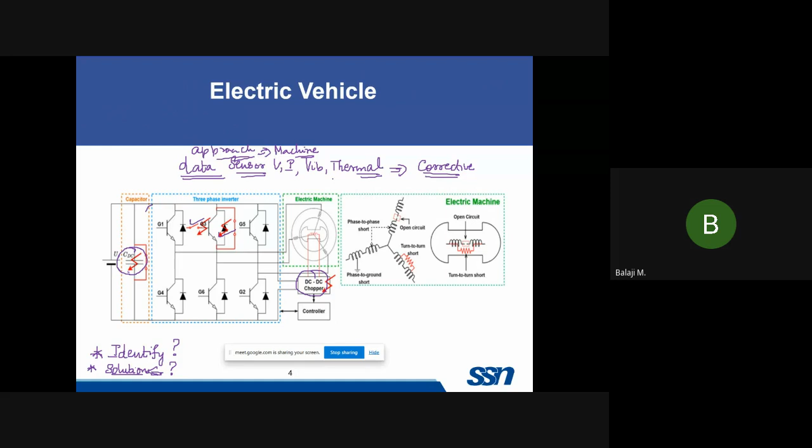This is one aspect. Similarly, the values have to interface with the energy management system, and it will provide the corrective action that is required: whether we need to charge it, what is the charge that is left, whether the vehicle can move or not, whether there is a fault in the cell. All these things it will be informing. Energy management is again coupled to two aspects, one to the load, the other to the charging equipment.

So this is just to inform you that in a battery management system itself, there are a lot of processes involved, and we need to monitor the data. So that is what I said: it is basically a data-driven approach. We require a lot of data for two cases. How will you identify it is a fault? First, we need to know the value under ideal condition and the value under fault condition. Only then will we be able to identify the fault.

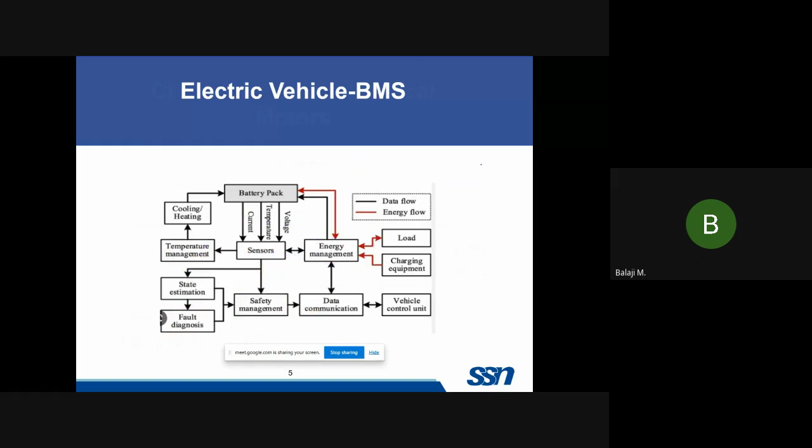So this is for a battery management system. I am talking about battery management alone. See, there are a lot of things involved in the battery management system as well. So this is one aspect. Similarly, when you take the drive aspect, there are again certain challenges there. That is what we need to understand. So this is a rough introduction of why fault diagnosis is very important.

And since these PMSMs and BLDCs involve permanent magnets, which are made of NdFeB, neodymium iron boron, some companies are also looking at switched reluctance motors for electric vehicles. I'm sure in one of these sessions, Prabhu will also be talking about how to design permanent magnet motors for EV applications. And tomorrow, I think Dr. Jayaprakash sir will discuss how to design an SR machine for electric vehicle application.

So each and every machine has its own advantages and disadvantages, but overall we can apply all these machines for electric vehicles. And we can understand that all these machines have emanated from a basic topology of synchronous machines.

From synchronous machines only, all these topologies, the brushless DC motor or PMSM motor or reluctance motor, all these machines have emanated from the synchronous motor topologies. And please understand, for fault diagnosis, each motor is different. The operation of each and every motor is different. The power converter that is required for the motor is different. So the fault diagnosis strategy will be different. So we need to choose the motor, choose the converter, and then only we can design a controller for it.

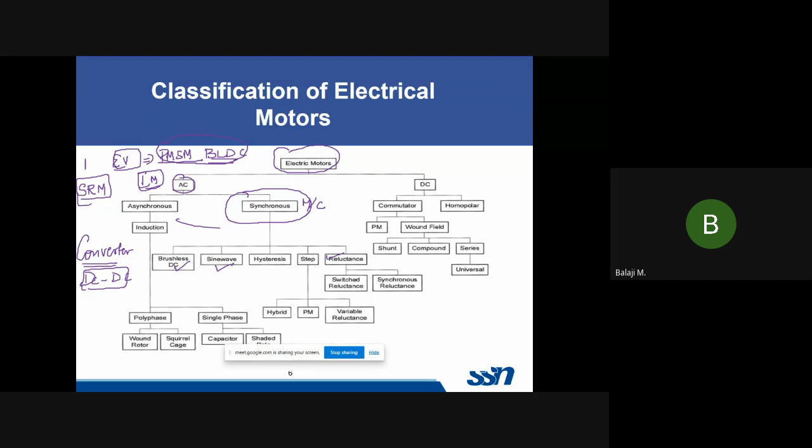So again, this offers a lot of scope for us to work, to take up a converter topology and proceed with the fault diagnosis for that particular converter topology. So likewise, we can expand our scope of work in this particular area. So this is the classification of electric motors.

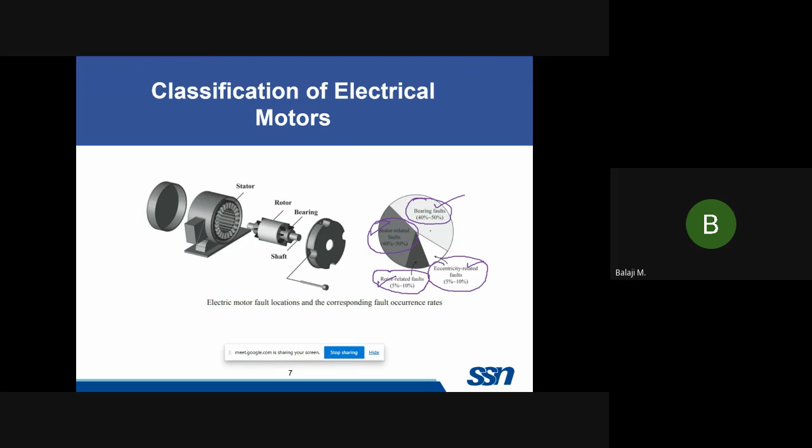So when you take an electrical motor, this is a general diagrammatic representation. We can have stator related fault, bearing fault, rotor related fault, or eccentricity related fault. Because the rotor also employs permanent magnets, there is a possibility of faults in the rotor as well. And bearing fault is separate. Stator related fault, since it employs winding, there might be winding open circuit, short circuit. And eccentricity related fault will also be present. It can occur at any instant of time. So all these things need to be analyzed and a fault diagnosis algorithm needs to be developed.

And these causes lead to different faults. It can be winding short circuit, winding open circuit, bearing damage, bent shaft, rotor to stator misalignment, eccentricity, dynamic air gap, semiconductor faults, semiconductor short circuit fault, DC link short circuit fault. Sensor disconnection is very important because most of the special electrical machines will employ rotor position sensors, or they also go for sensorless control. But if they employ an encoder type of thing, then the sensor fault is very important.

So likewise, there are different fault modes, and what are the effects? The effects are reduced torque, vibration, noise, eccentricity, increased losses. Vibration will cause torque pulsations. Increased ripple voltage, closed loop control failure, control effect reduced. So all these are effects of fault. So this slide summarizes what are the causes of fault, why the fault is caused.

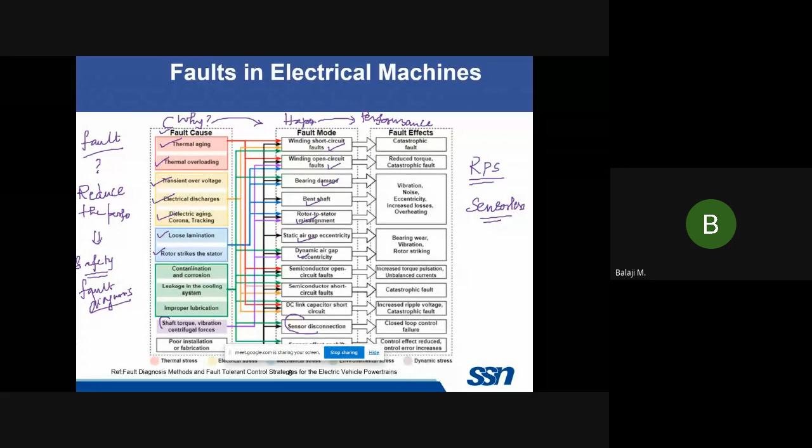So now why is fault diagnosis very important? Because there is a possibility that there can be all these faults, and all these faults will reduce the performance of the machine, and they will reduce the safety aspects of the machine as well. So that is why we need to go for a fault diagnosis approach, fault detection, and we need to provide a solution. That is the main reason why researchers are working in this particular area, right?

So again I have summarized a few points. Effects of fault: it can be unbalanced voltages, increased torque pulsations, decreased average torque, increased losses, excessive heating, and safety aspects as well need to be considered. So these are all the effects of faults in electrical machines, and we need to diagnose this. So how are we going to do it? That is what we call condition monitoring, or predictive maintenance.

So what is predictive maintenance? We measure the signal. What are the signals that we can measure? We can measure the voltage signal, the current signal, the vibration signal, and the thermal aspects. All these signals we are going to measure, and we are going to see if there is a fault or not, based on a threshold. We'll have a threshold for an ideal case, and based on the threshold, we'll see whether there is a fault or not.

If there is a fault, we'll diagnose the fault, we'll analyze the fault, and we will take an action. This action can be change the speed, or stop the vehicle, or charging, or switch on an alternate switch. Like this there can be different actions which can be taken. So this diagram summarizes the entire process of fault diagnosis.

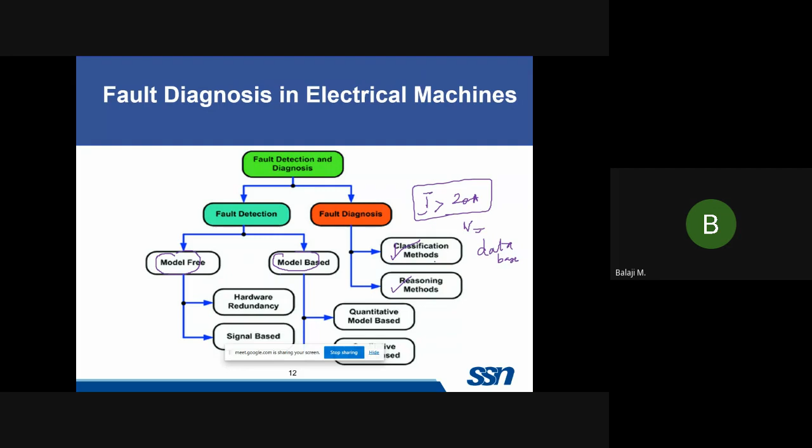Again, I have a data, I'll train it, and then I can classify what is the nature of fault. So this requires a lot of database. But this is basically reasoning. I predict the value, and from that I'll have the output. So this is what I call model based.

In a model based approach, what will happen? I'll have the original machine. I'll have the model. Both will be running in parallel. I'll give the same input. This model will predict the correct output. In case of fault, the observed output will vary. And based on the comparison between the predicted output and observed output, I can make a decision.

I'll repeat it. So in a model based approach, I'll have a model which is similar to the plant which is running. I'll give the actual input to the plant or the drive as well as the model. This model will produce the correct output. I have tuned it to the actual output. And then I'll have this plant. This will give the actual output.

So based on the difference between the correct output and the actual output, or I can call it the reference output and the actual output, I can make a decision what type of fault. So this is one approach which I can do. This is what I call model based fault diagnosis.

So what are the different methods here? Here again we have two things. One, we call it a qualitative model and quantitative model. So here we have knowledge based trend analysis and hierarchy. We can have different hierarchy based models, or here I can have a parameter estimation. I estimate the parameter. I go for computational intelligence method, or I go for quality control based method. So these are all the model based fault detection methods.

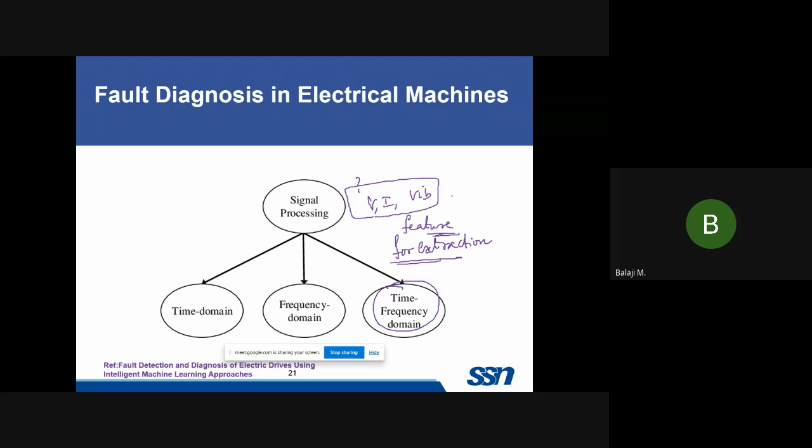And why is signal processing very important? Because as I said, all these voltage signals, current signals, and vibration signals are time varying. So that is why I'll go for time frequency transformation for extracting the features. In time frequency transformation, there are different techniques. I am not going into the details.

Once we extract the features, then we can identify the fault with the help of neural networks, fuzzy logic algorithms, expert systems, or we can use hybrid AI techniques for identification and classification of the faults. So this is how it is done.

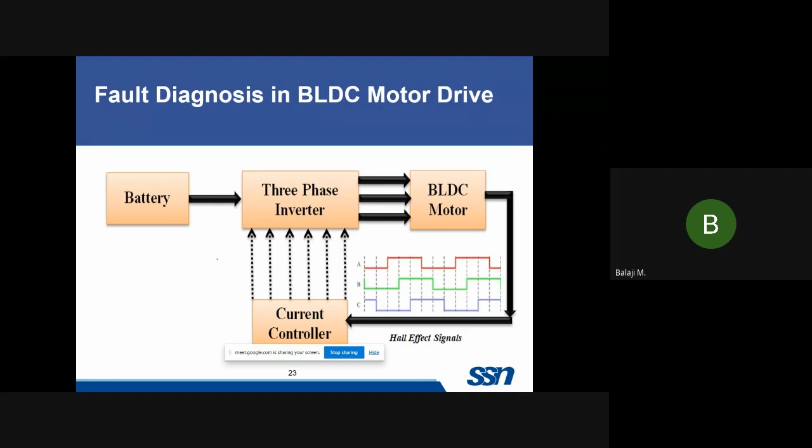So now, take fault diagnosis in BLDC motors, how it is done. We have done work on Hall sensor fault diagnosis. We have a battery, followed by a three-phase inverter, which is given to a BLDC motor. The output from the inverter drives the BLDC motor. We have a current control. So this is a simple block diagram for a BLDC motor drive.

So here, this is the structure. Depending upon the requirement, we can also go for a boost converter. So what we tend to do is take the S transform analysis.

Okay, why do I say S transform? S transform is a time frequency transformation to extract the features. So from these features, we train a neural network for classification, whether it is an open circuit fault, single phase switch fault, double switch fault, or short circuit fault. Like this, we tend to classify the different types of faults. So this is what we were aiming for, right?

So there are different time frequency transformation techniques. Either you can go for S transform, or wavelet transform, or short time Fourier transform. Like this, you can have different transformation techniques, and each one has its own merits or demerits. There is one more transform, which we call the Hilbert transform, so you can also go for that. So that is how it is done.

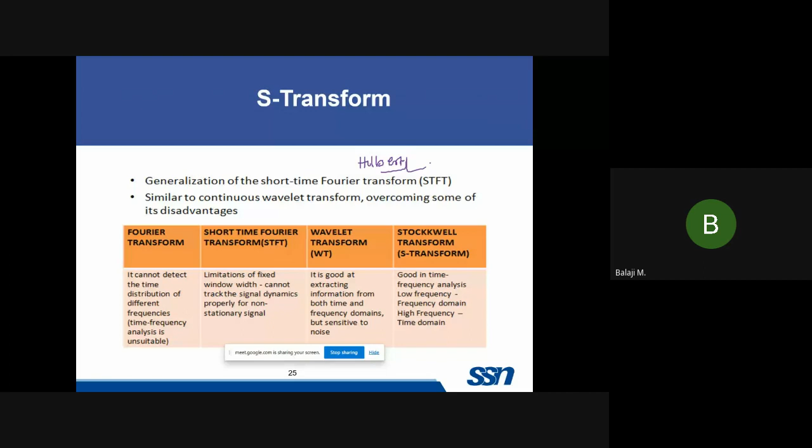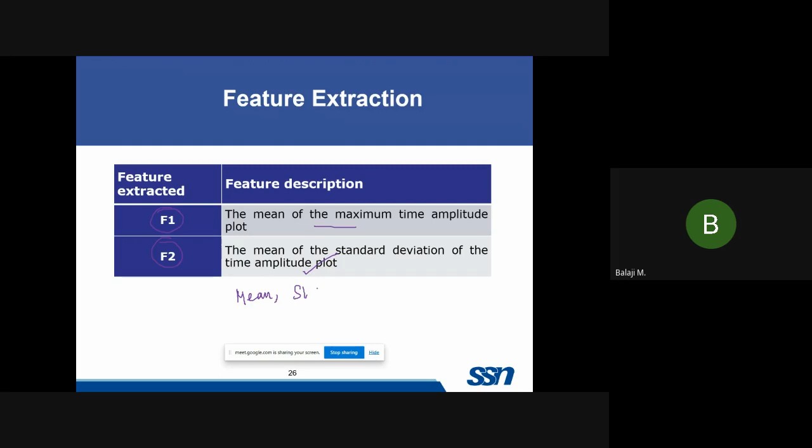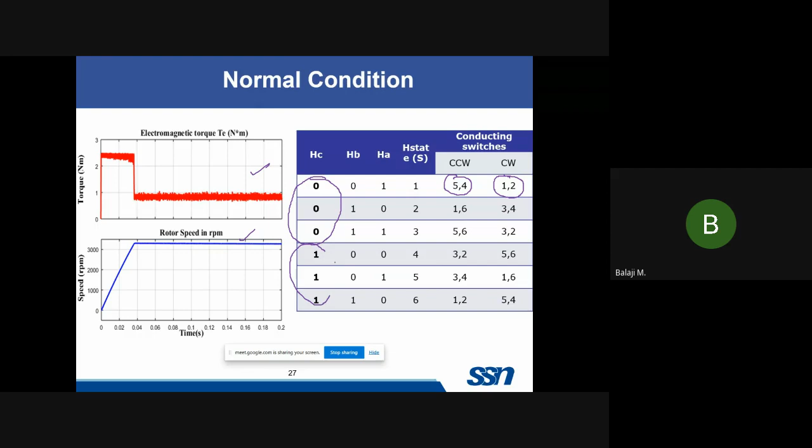Now we will extract the features for normal condition. These are the values for the normal operating condition. Now we introduce a fault in a Hall sensor. We assume that there is a fault in Hall sensor C. When there is a fault in Hall sensor C, we see that this Hall sensor is not changing its value. In the previous case, the first three states were 0, 0, 0 and the next three states were 1, 1, 1. This is the normal operating condition, so there is a change in the Hall sensor value.

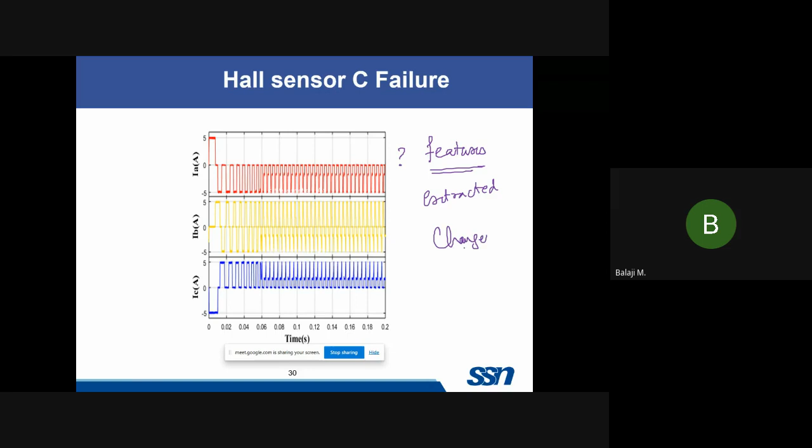So due to this, what will happen? The features that are extracted change. So what are the values? See here, the values are changing. This indicates that there is a fault in the Hall sensor, a fault in Hall sensor C. So these are the values that we have taken.

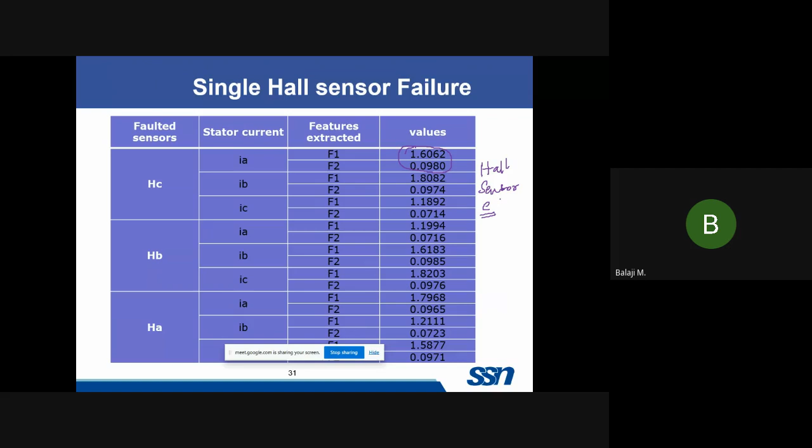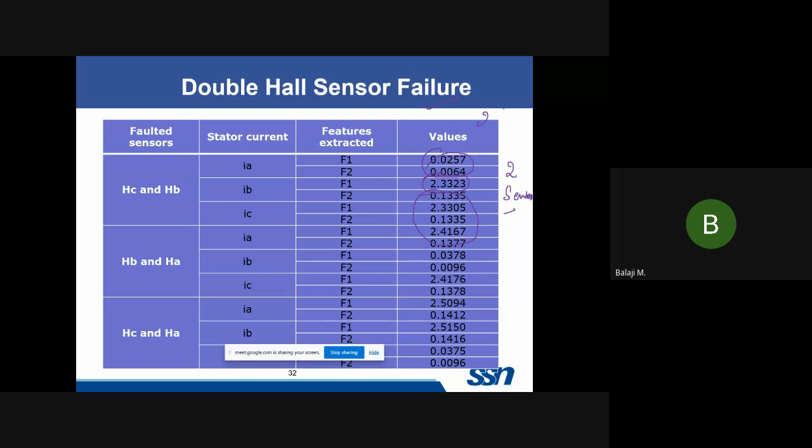So I'll have the feature values. If any one of the feature values matches with the single Hall sensor fault, what will happen? I'll say that there is a Hall sensor failure. So for that, what I require? I require data. So that is how I'll classify the fault.

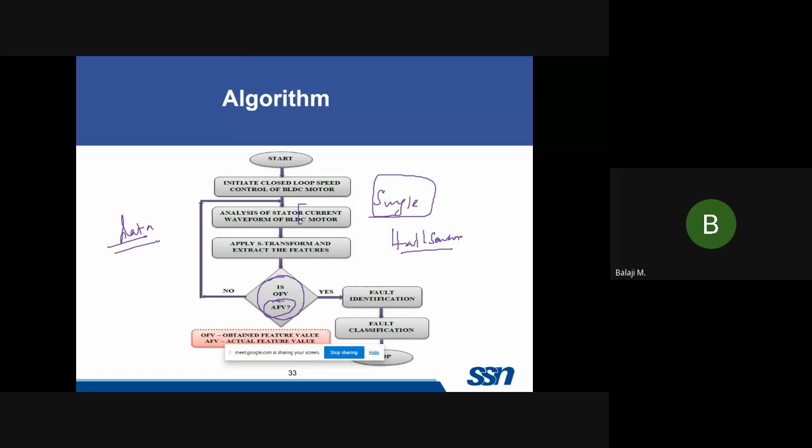Okay, so this is again a diagram. I'll analyze the stator current. I'll do S transform analysis. From the S transform analysis, it will identify whether there is a single Hall sensor fault or whether there is a double sensor fault. Okay, so this is how it is done, right?

Okay, right. So now what I have made is a MATLAB video presentation on how to classify, how to extract the features. I'll just share that particular presentation so that you can have a better idea on this. I'll stop sharing this, and I will share that particular window.

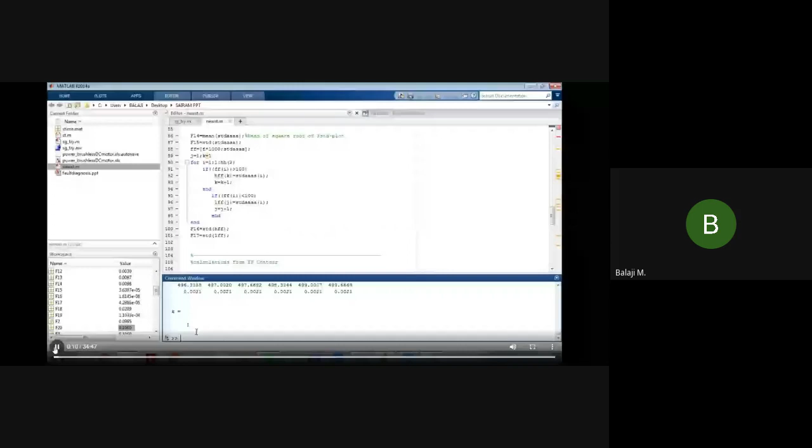Are you able to hear the sound? Yes, sir.

To extract the features using S transform and Hilbert transform, I'll take first a general sine wave and we will see how to extract the features of the sine wave, and then I'll take a sag wave, and then a swell, and I'll show how the features will vary. Once it is over, we'll proceed to how to extract the features in the same way for the BLDC motor that we have used in an electric vehicle, or any motor, any induction motor, you can use

the same procedure. So as I said in my lecture, whenever we want to identify a fault, there are two steps. The first step is we need to extract the features. The second step is we need to classify what kind of fault. So we are in the first stage, feature extraction. So for this, first I'll take a simple sine wave. First I'll generate the sine wave for simplicity.

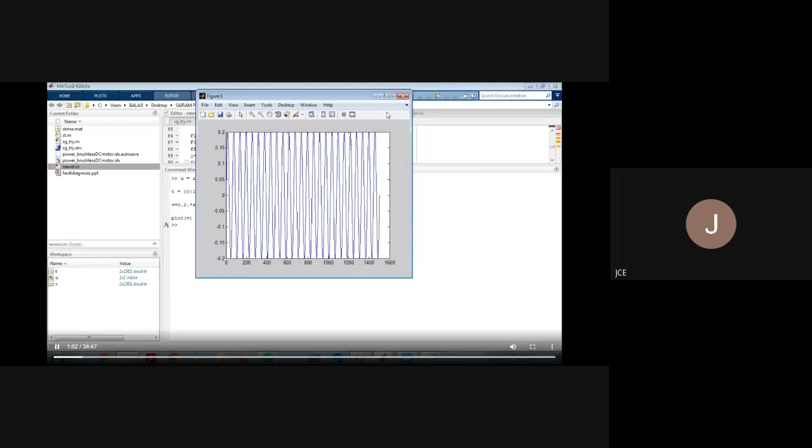These are all the initialization instructions. I initialize the value of t. I give the limit for t. T varies from 0 to 0.5. This is the time interval for t. And I'll just say v is equal to 0.2 into sine omega t. And then I say the plot command. So we will get a normal sine wave. This is the waveform of a normal sine wave.

Now, the algorithm that we are going to use should identify this as a sine wave. So this is a time varying waveform, or we can say the waveform varies with respect to time. So we need to apply a transformation technique, and we need to extract the features that will characterize this waveform. We should get numerical values that will characterize the waveform.

We can take the RMS value of this, but when we have more number of features or more number of waveforms, then RMS value might not be a good indicator. So we'll go for the transformation techniques, S transform and Hilbert transform. So we'll see how to use the transformation technique. I have stored the values in a variable called v. Now I'm going to apply an S transform.

So to apply the S transform, I have a pre-written program. Just 1 minute, it will open. See, the program is open here. So this program, which is available in MATLAB, will give the S transform features.

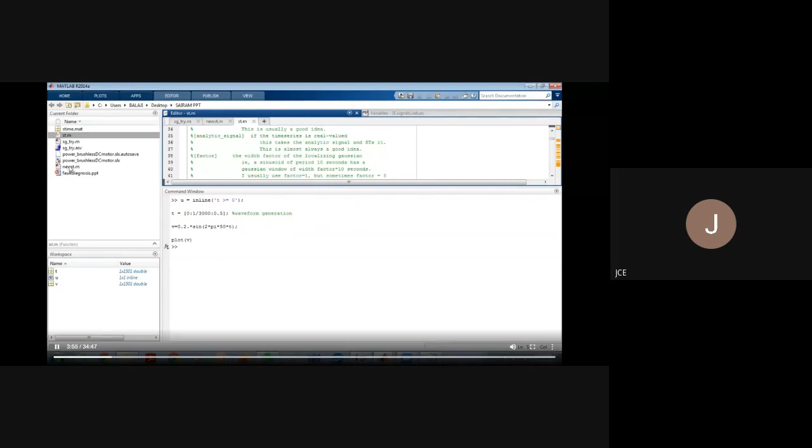So for this, what is the input? The input is going to be my waveform. Here I have taken it as a sine waveform, right? And I need to extract the features. So I have written a program called newst. You can have any name. So there are two programs. One we call newst, which is used to extract the features. Here I have written a subprogram. So what I do is I take the S matrix. ST stands for S matrix.

T stands for time, F stands for frequency, and I give the name of the input value as V. V is my sine wave. So when I execute this particular program, it will in turn call this ST, and I'll get the features. So F1, F2, F3, F4, F5; I have taken 20 features. We'll get the values of those 20 features.

So that is the first step. What is the first step? I'll give this program new ST. So when you see, this will take the S transform, and here we'll get the features, F1 to F10, because it is arranged like this. Like this, I have initialized 20 features. I'm not going into the details of what features we have used. So these are all the values.

So for example, for a particular sine waveform, here the magnitude we have kept as only 0.2. If you see the plot of the waveform, you'll be able to see. So what is F1? F1 is a maximum of the time amplitude plot. The S matrix will return two values, time as well as frequency. So the first four features represent the time amplitude plot, or we call it the time maximum amplitude plot.

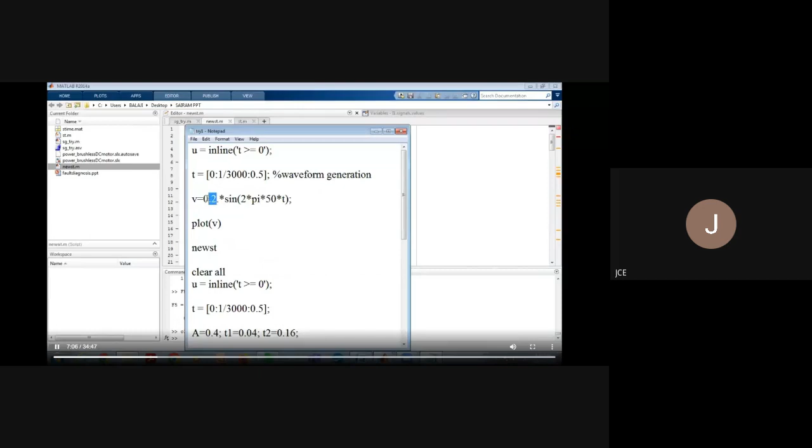Now I'll clear this. You can also get a normal waveform with a higher amplitude. So I'll put it as 1 and first plot this waveform. Now we have a higher amplitude. This is also a normal waveform. Why we are doing this exercise is because it should differentiate the normal condition from a sag condition or a swell condition. This is not a swell; it is a normal sine waveform.

Even for a normal waveform, when the amplitude varies, the feature values will vary. That is why we take different waveforms as inputs and train the machine learning algorithm. So again, for a normal waveform, I do the S matrix and calculate the value. Even though it is a normal waveform, F1 is 0.5. F2 is also 0.5, F3 is 0.5, F4 is 0, F5 is 0.5.

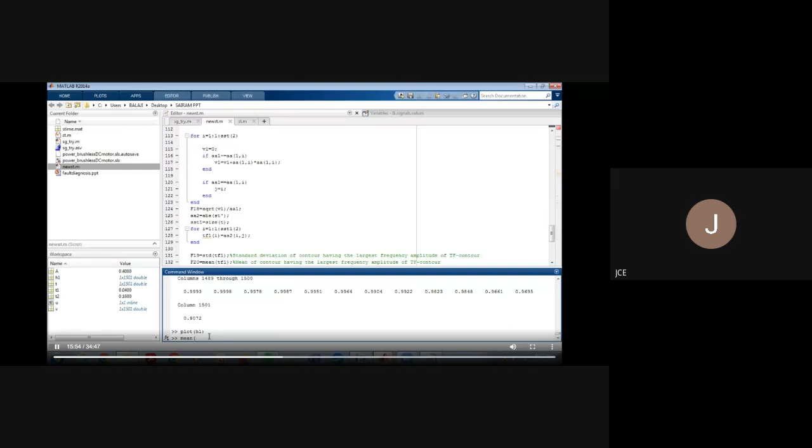So now how to characterize this? To characterize this, again I can take the features. I can say mean of H1. So mean of H1 is 1.0957. So this is one technique. This we can extend. We can have some more features, and you can characterize the features corresponding to that particular wave.

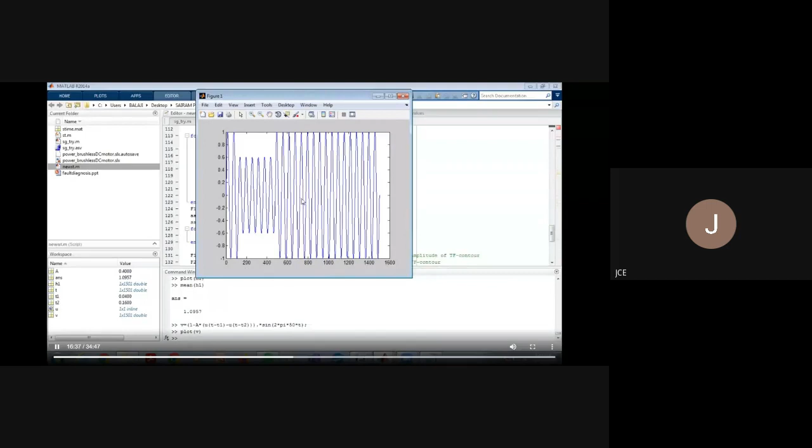Now the same thing, we'll just take up one more example. I have taken a swell now. Now I'll take a sag. So when I take a sag, I'll just give the value and say plot of V. So now there is a sag waveform. For this sag waveform, I'll take the Hilbert transform. Now I'll say plot of H1.

So see here, there is a marked difference between those two waveforms. In the first swell waveform there was a swell, but now here there is a sag. So there is a dip here, right? So it means that there is a variation here. Now, if I take mean of H1, it will be different. It is only 0.9, indicating that there is a sag.

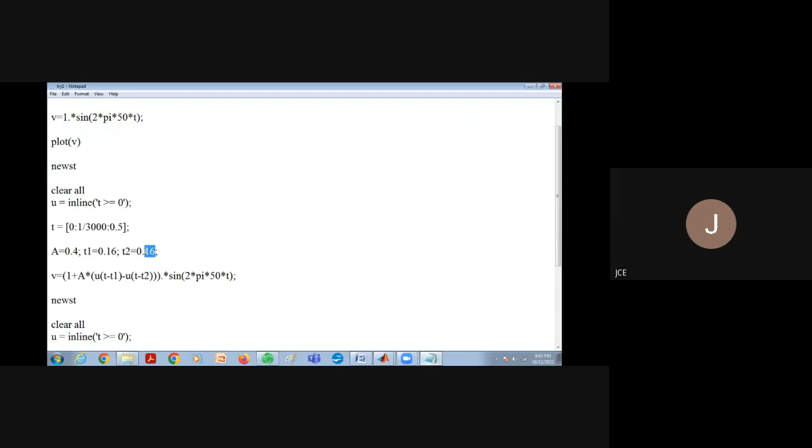Right? You can also make different instances of sag and swell. Here, the value that we have given is A is 0.4, 1 plus 0.4, so it will be 1.4. Here I will say it starts at 0.16 and it will end at 0.24, for example. So I'll generate a different instant. I'll say clear all, just to show the difference. Since we saw the swell and sag waveform, I'll just take it as a sag itself.

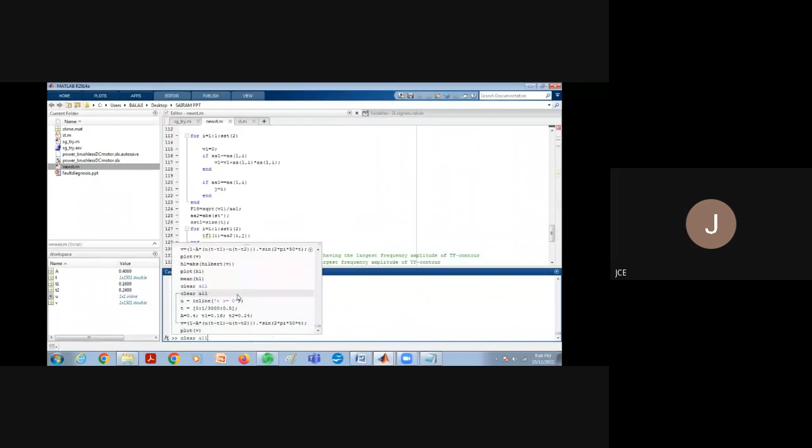Now I'll take plot of V. See here, now there is a variation in the instant where the sag occurs. So now if I take the Hilbert transform of this, see what happens. I'll plot it. The instant will change. But we'll see what happens to the mean value. The mean value also has changed a little bit.

So depending upon the time at which the fault occurs and the magnitude of the fault, the features will vary. So the features are used to characterize each and every waveform. This is what we call feature extraction. Now, when I give these features as input to my classification algorithm, we will be able to classify the nature of the waveform, whether it is a sag, a swell, or an interruption.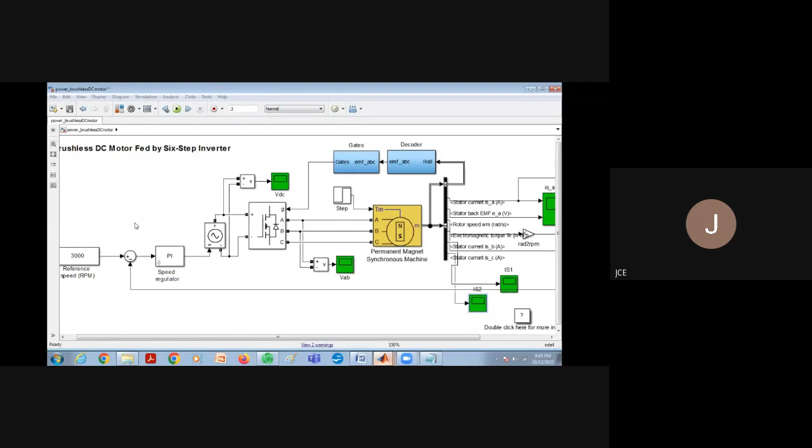The same principle we are going to apply for a BLDC motor or for any motor. So I have taken a MATLAB model, which is already available, for simplicity. This model is available in MATLAB just to show how a fault can be created and how you can characterize the fault. In a BLDC motor, I use an inverter, which is used to drive this BLDC motor. And these are all the measurement parameters.

I have a Hall sensor, and the Hall sensor output will be given to the gate signals, which will in turn trigger the gate of the inverter. So this is the normal flow. Based on the Hall sensor, the triggering of pulses of the inverter is going to take place.

Depending upon the speed reference that I give here, as per this particular example, the input voltage is varied, right? Here they have used a PI controller for changing the source, but we do not usually do this. We'll sense the current and we'll just change the gate pulses, right? So there is one method. But I have taken a model which is already available in MATLAB itself.

So when you execute, this is under normal condition. This is where I have changed this. I'll just show. Yeah, this is compiling. Just a minute.

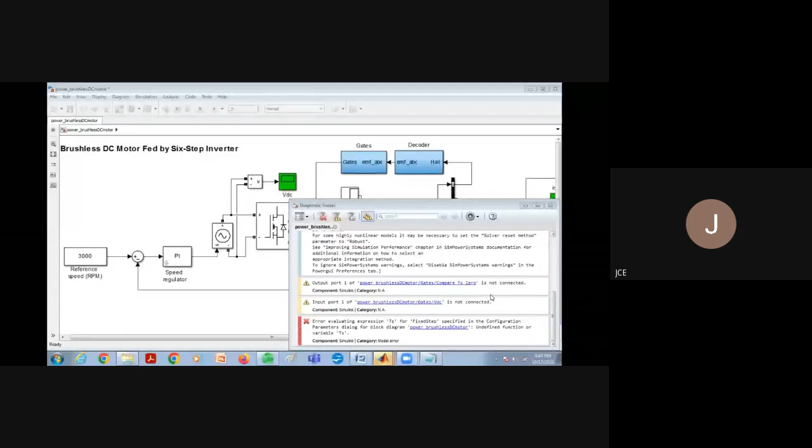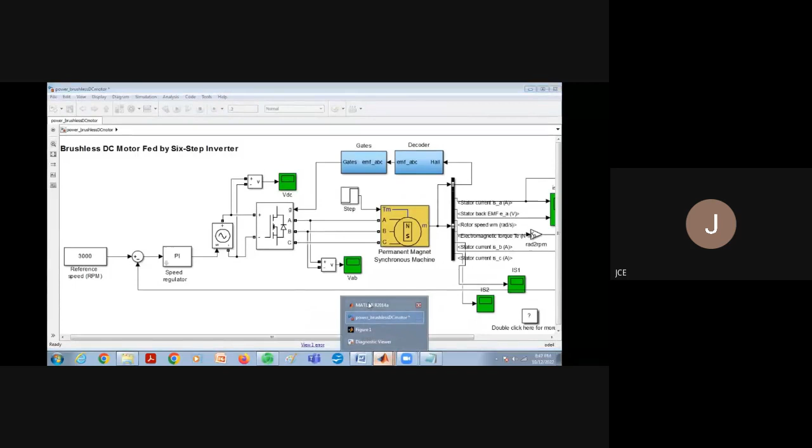So here I forgot to give one input. So we need to give that input. Okay, sampling time I have not given. So I'll give the sampling time TS as 5e-6. So now it will work.

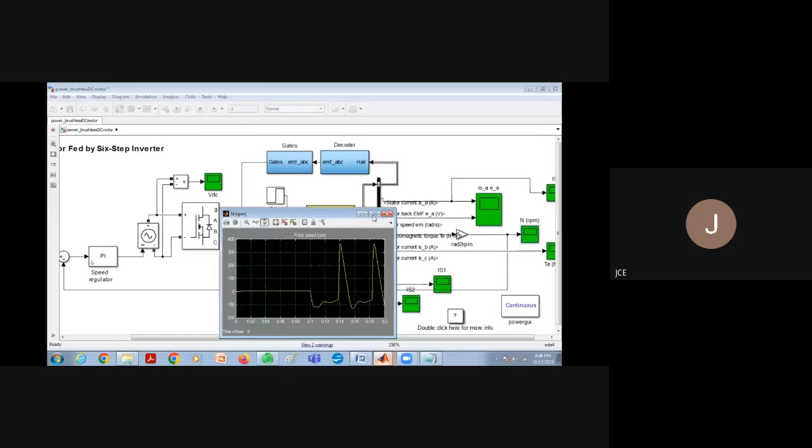So I have given this as input. So we'll see the output waveforms. So when you see this is the speed, we have given speed as 3000. Sorry, I think I have not changed this here. 1 minute. So here to introduce fault, I have made a change. So I'll just remove that as well. So now it will work. So we'll see the normal operation.

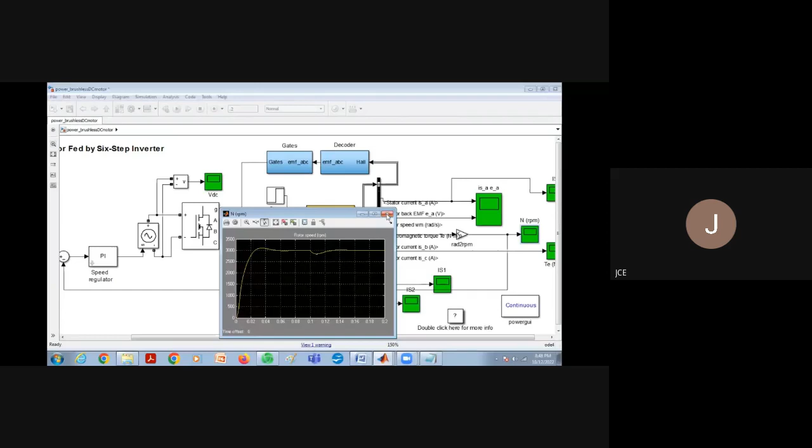So when you see here, this is the stator current, back EMF, rotor speed, all these things we are sensing. And this is the normal current waveform for A phase. This is for B phase. And the other thing is for C phase. And we also get the torque and speed. This is the torque and speed.

Okay. They have given a step input. Initial value is 0. The final value is 3. So that is why there is variation in torque. Right? So now we want to analyze some fault which is occurring in the inverter. So first we need to take this particular waveform and characterize the features for a normal operation. What are the features that are there for a normal operation? Only then we can characterize the fault. I'll just enumerate the procedure.

So this waveform, I have stored it as a variable, I1. The same procedure I am going to apply. That is why I explained the S transform previously. So now the variable is I1 here. What I do is I just see the value of I1. I1 is stored in I1.signals.values. So when you see this, there are totally 5,000 values here. So here, that is why sampling plays a very important role. So this has to be a continuous process wherein we need to sample the signals.

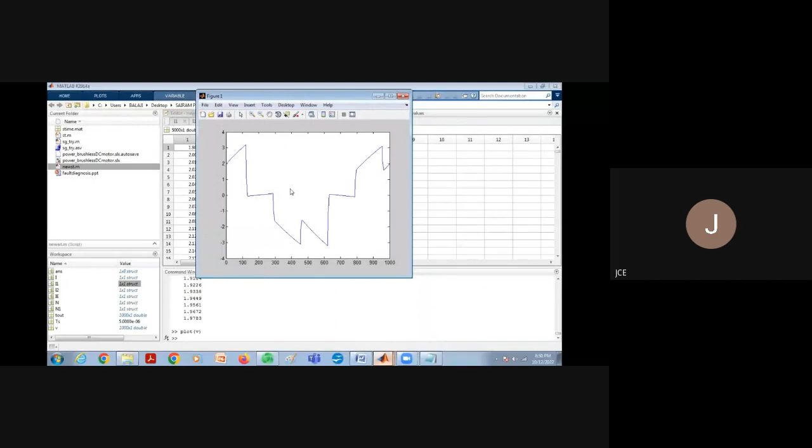I'll take first 1,000 values. So I'll say V is equal to I1.signals.values of 1 to 1,000. I'll take the first 1,000 values. Now I'll plot this V. So when you plot this V, I'll just get this waveform. So what I'm going to do is I'll apply the S transform for this particular value. So I'll get the features.

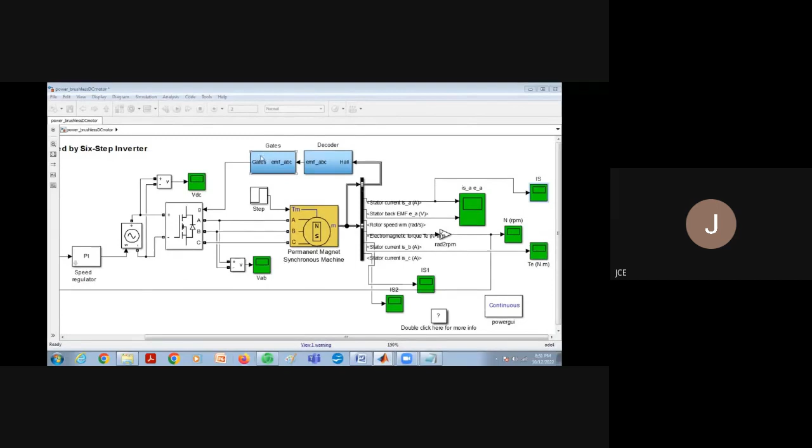Now suppose I am going to introduce a fault. For introducing a fault, you can make these as individual switches and then introduce it, but I am giving a simple procedure. See here, I am giving 1 to the first device. So the first device, I am removing the signal, and I am going to keep it permanently on. It is not going to be on off. It is going to be permanently on. So now I'm going to simulate this.

So when I simulate this, see the current characterization. The current value will change because I'm keeping it permanently on. It's like short circuit, right? So when I take this particular value of stator current, see what happens. I'll take the first 1,000 values again. Now I'll take newst. Okay, it is better to clear this and then do it. I initialize first TS as 5e-6. I'll just run this.

So this is under fault condition. So what I do here is I'll take the value of V as 1000 values. I'll take newst. So see what happens. Here the value of F1 is 18. So it has jumped to 18. So it means that there is a fault. And the fault can occur in one switch or in multiple switches as well. So that is why we go for machine learning algorithms and more number of features to accurately classify the fault.

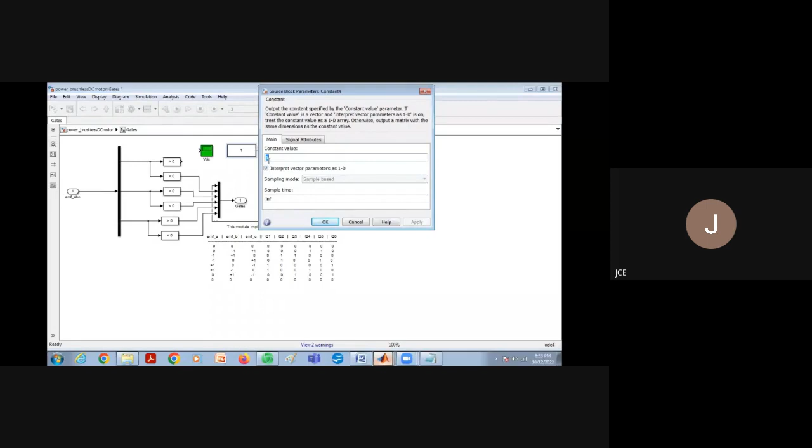Right. So here again, F2 is 18, F3 is 18, F5 is 0.5 because F5 does not change, F4 is again 0. So like this, each and every value is going to change here, which will characterize the fault. One more thing I'll do here, instead of permanently turning on, I'll permanently turn off this. It is like open circuit. So that switch will not be triggered at all. So what happens?

See, this is the output. Now again, I'll repeat the same thing. It's better to run again. I'll just say clear all. I'll just say CLC. I'll just initialize TS. So now I'll run it again.

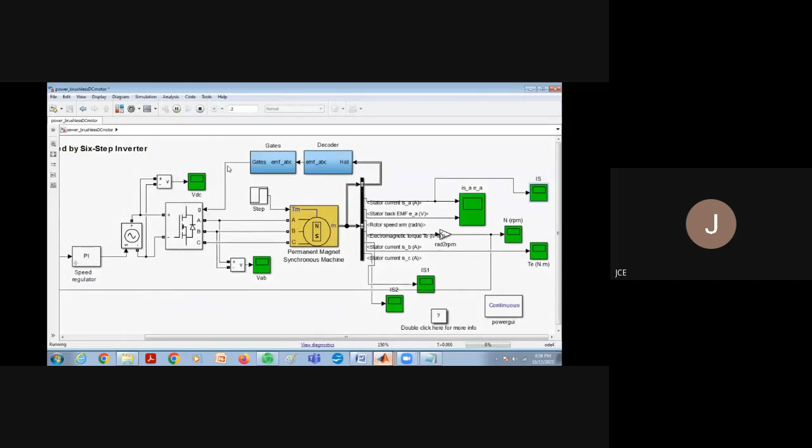So what will happen? I again take the first 1000 values. I'll take new ST. Now if you see, the value is different. Now it has become 1.6186814. Similarly, F2 is again the same value. This is 0, F4 is 5. All the other values are same. Right. So depending upon the waveform, the feature values will change or stay the same.

So like this, what happens now? I have made an open circuit. So there is a distinction between a short circuit, that is permanently making the switches on, permanently making it an open circuit, and a normal condition. So what we need to do? We need to prepare a matrix like this, right? And it should have the waveforms at different time instances.

One more thing that is very important is that the fault can occur at any instant of time. So here I can couple a time and say that only during a particular time there is a fault. For this, we can have a step waveform like this, and we can also say when it becomes 0 and when it becomes 1. You can give a step input and vary the time of instant of fault.

So here we are assuming that the fault occurs directly when the motor starts. But that might not be the case. It might be under normal operating condition, but after some time the fault might occur. So we need to take care of that condition as well. So a large database is required. Why? Because the fault can occur at any instant of time, right?

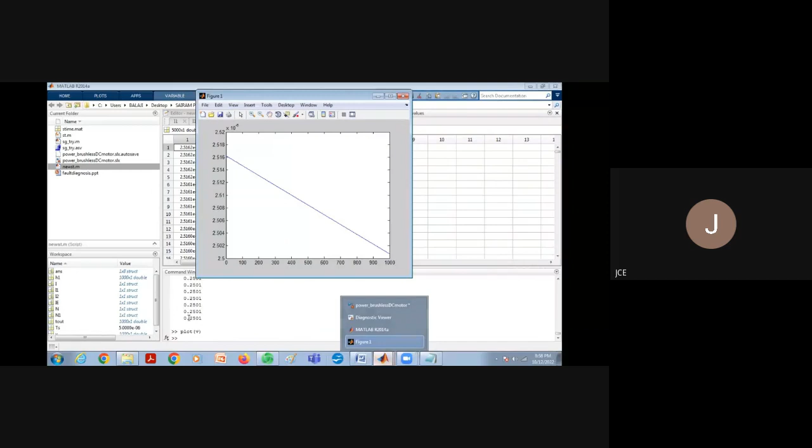Right. So I'll say plot of v. This will give a plot indicating that it is decreasing, because the value we have given at the gate is 0. Now we can also take the Hilbert transform. So we can take the Hilbert value, mean of h1. Mean of h1 will be 0. Now if I introduce it as a permanent 1, if I keep it as 1 itself, again there might be a change.

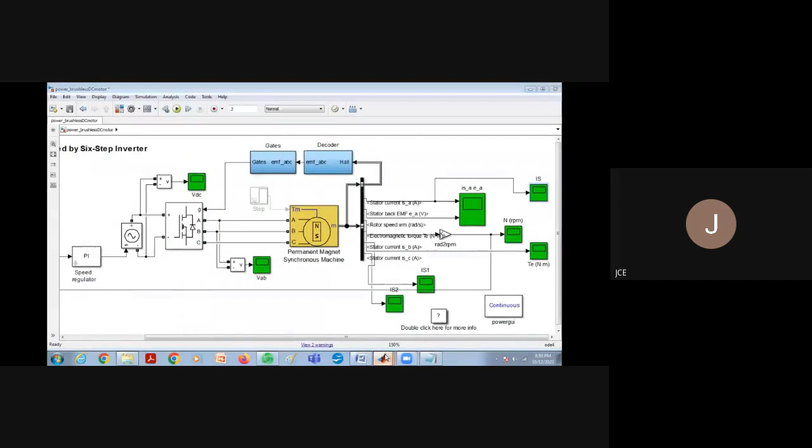So there is a variation here. So what I do here is, it is better to clear it. I'll say clear all. I'll initialize this, and now I'll again simulate it. See what I'm doing? I'm again taking the first 1000 values and Hilbert, and I'll say plot. So see, there is a change in the nature of the waveform because it is permanently 1.

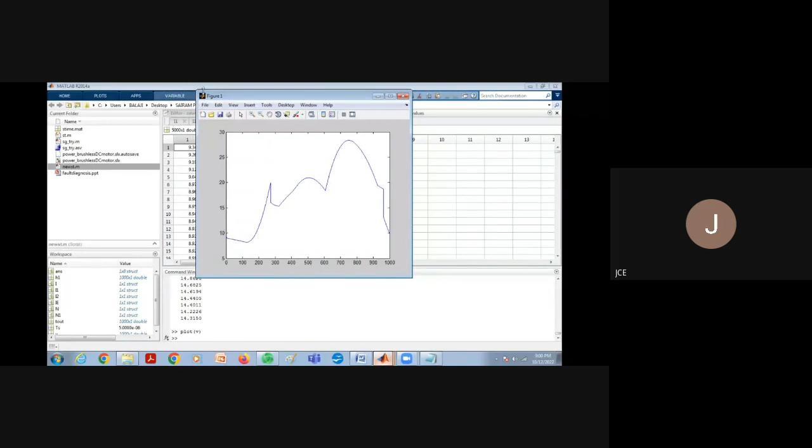And now if I take the mean of the Hilbert transform, the value is changed. So likewise, for different fault conditions, you can extract the features, and these features will form an input to your classification algorithm. This is the first part. So I have explained how to extract the features using the feature extraction technique, namely time frequency transformation techniques, namely S transform and Hilbert transform.

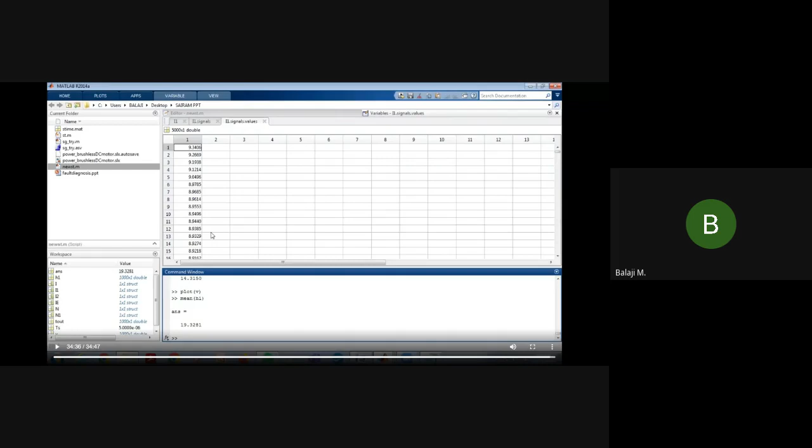Okay, so participants, I thought I would share that particular presentation so that you'll be able to understand it easily, right? So coming back to the summary. Okay, so I have come to the end of the session. So there are 2 steps. First step is we should extract the features. Second step is we should classify them. For classification, as I said, you can apply any of the machine learning classifiers.

So if there is time, I will take it up as the next part, because there is a time constraint. I thought I would explain it, so that is why I prepared a video so that you will be able to understand it. So the machine learning algorithm based classification will form the second part. So this is how you can diagnose the fault in electric vehicle drives.